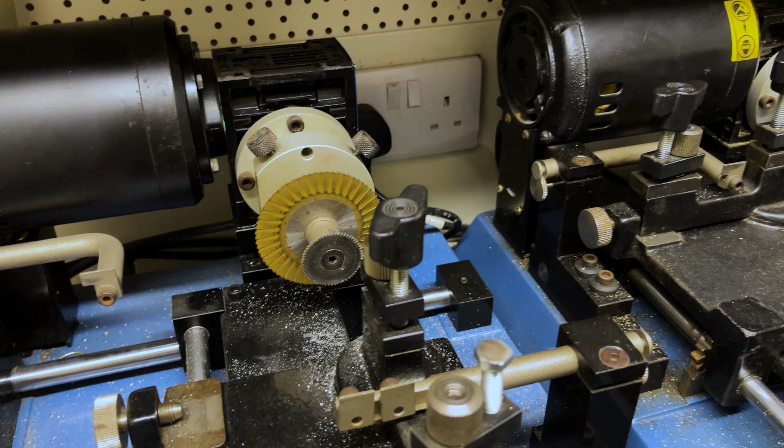Recently I obtained this key machine as a secondary machine to the existing one we already have. The reason being is this fixture is broken on the first machine, which doesn't allow you to swap from the A carriage to the B carriage.

The problem is when we received this second-hand machine, it doesn't have a blade guard. As you can see from this original machine, this blade guard screws onto there and covers the blade when you cut keys. This machine came with a temporary guard someone had manufactured out of a bit of flexible plastic, which wasn't really up to the job. So in this video I thought we could go about creating a similar guard for this machine.

Now luckily in this example we've got an item to copy straight off the bat. As you can see, this unscrews at these 2 points and the blade guard simply slides off. Because this is a similar machine, it slides onto there the same way. So the idea is to reproduce some kind of guard that will go on this machine to protect my eyes when I'm cutting a customer's key.

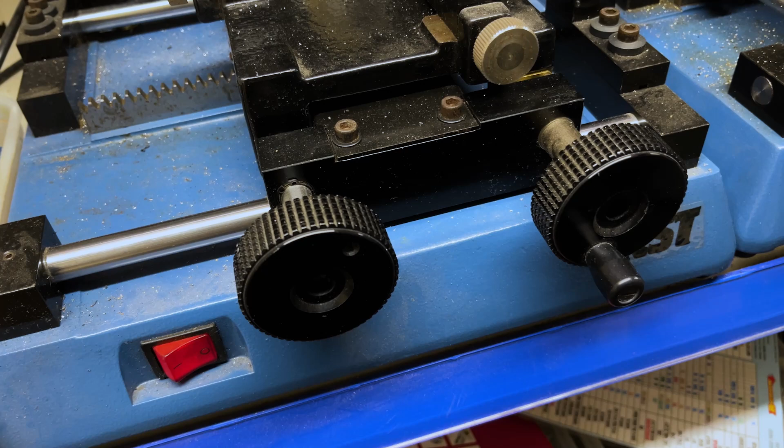A little bit of background about the machine - this is an RST Mortice machine, an American company. With us being in the UK, these kind of things are quite difficult to source. We'd have to find a supplier in the USA, import it, etc. By the time you do that, it becomes very costly indeed, just for this small piece of plastic.

And a bit of background about me in general - we own a key cutters and DIY shop here, so as you can see, if you just pan round, you can see the vast array of keys that we cut on a daily basis. So these machines are in constant use, so it's something that could really do with getting fixed.

So what we'll do is jump on a piece of paper, get some measurements, then into CAD, create a design, and see if we can 3D print this.

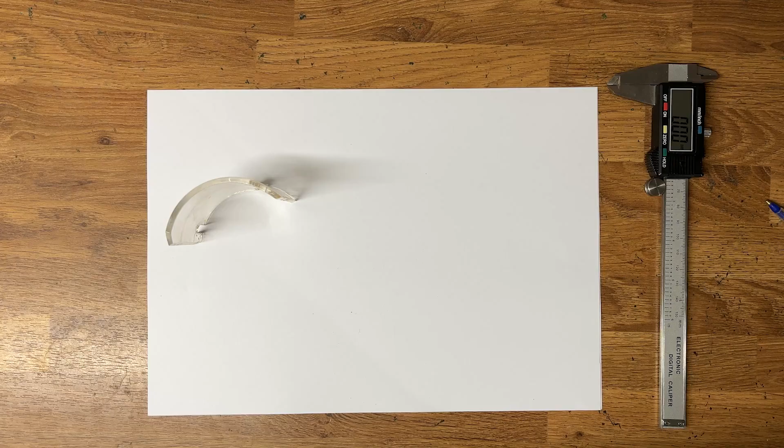So let's go about taking some measurements for this guard. I've got the guard, got some calipers, sharpen my pencil, so we should be ready to go. Now you'd think to yourself, first thing we do, let's draw a sketch. Not this time - first thing I'm going to do is actually trace around this object.

Now other people are going to have other methods of doing this. You know, you could take a photograph and then drop that into CAD, etc.

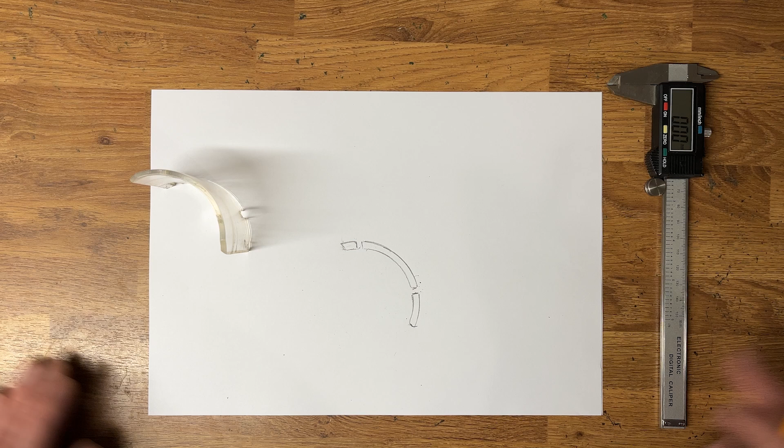What I'm going to do is take this traced image and put it onto a flatbed scanner. The reason to do this is because when you take a photograph of something, it tends to get a little bit distorted by the camera angles. Whereas if you've got the physical object and trace it, then put it onto a flatbed scanner and into CAD and calibrate the dimensions, you'll hopefully get a pretty accurate representation of what you're trying to copy.

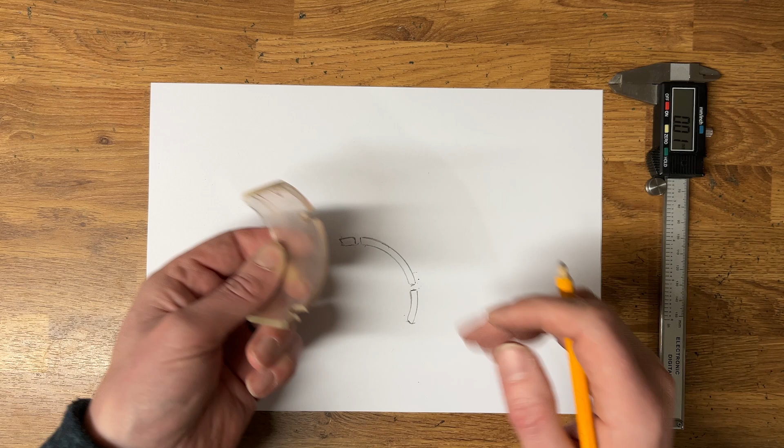So that's what you would say the base plan of this item.

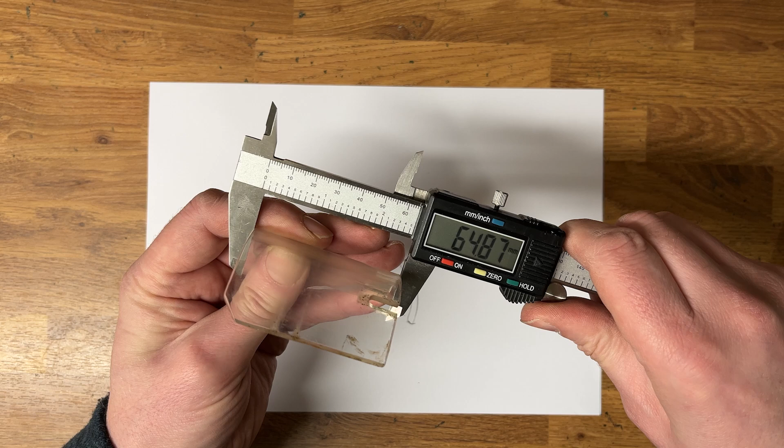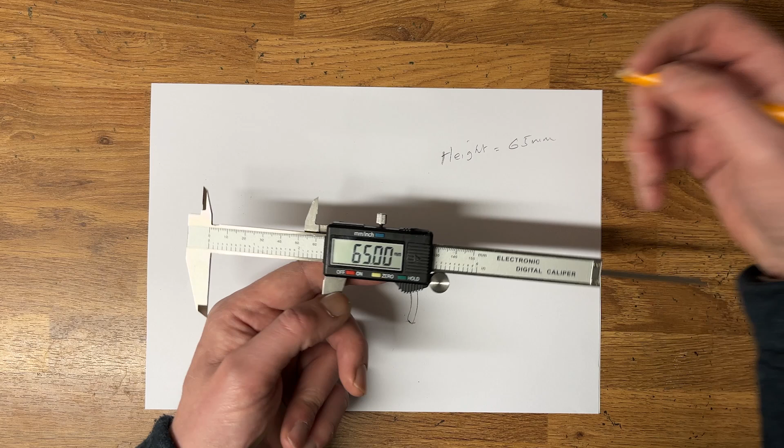Now there's a couple of measurements we do need. One being the height of the guard, which in this case we'll call 65 millimeters. So I'll just write height: 65 millimeters. I apologise, some USA viewers may prefer that in inches - 2.559 inches. Apologies that I can't do all the video in inches because I've got my CAD set up in millimeters, as that's what we predominantly deal with here in the UK.

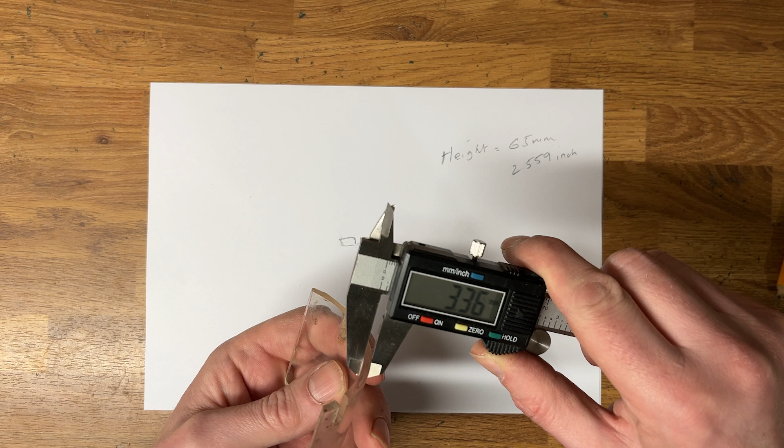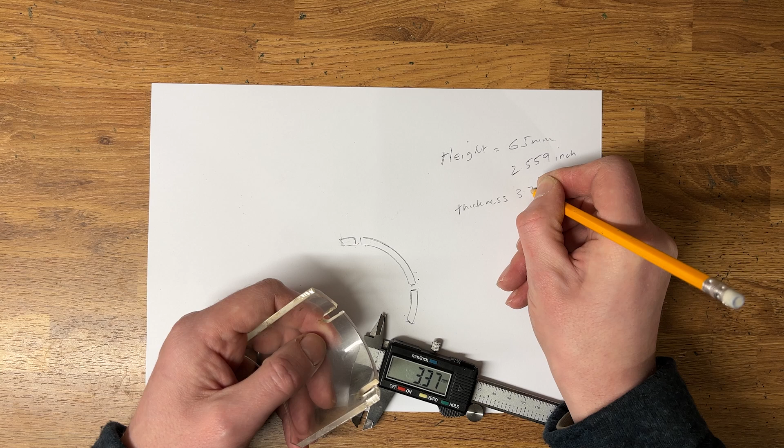The other measurement we need is the thickness, so in this case we'll go 3.3 millimeters there. Just to convert that to inches, 0.132 inches.

The other measurement we could do with is the overall height of this, where the screw hole's going to, which in this case I'll revert back to millimeters - 11.85. So that's as cut out, 11.85 millimeters. In inches, that's 0.465.

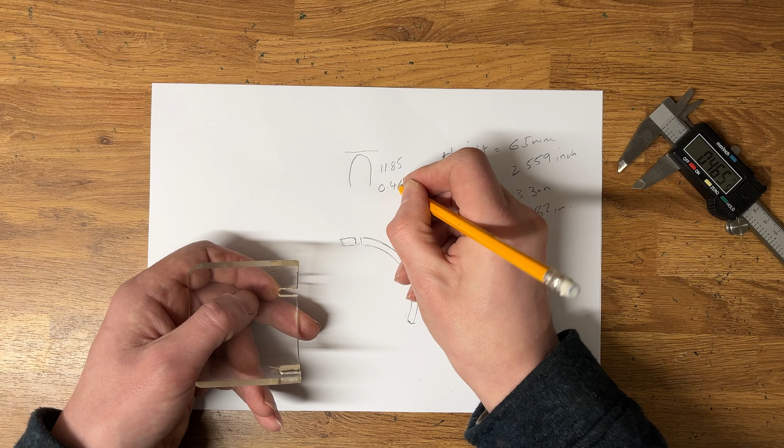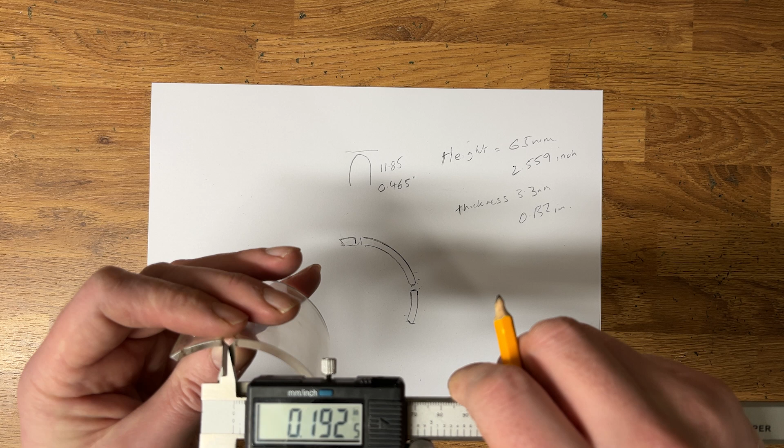And just for clarity on this drawing, I'll just take that bottom measurement. Again, converting to millimeters, 4.89.

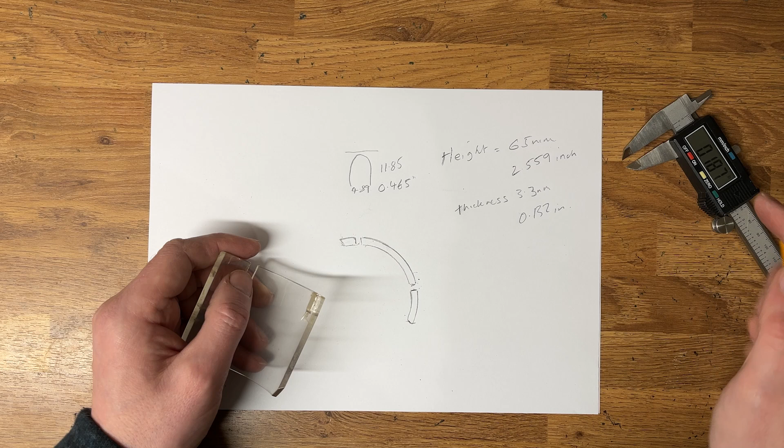Which is 0.187 of an inch. So that should be the basic measurements we need. Obviously, I've got to take into account these curves, etc.

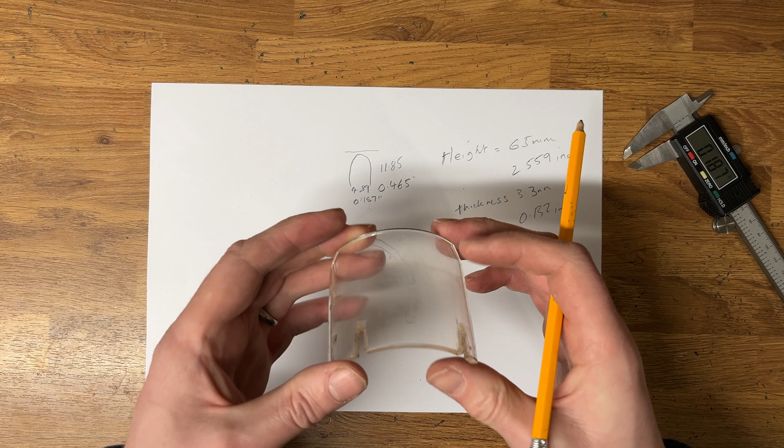I'll show you how I handle the shape of the bottom, or how I would handle it in the best way. As you can see, even this one's got a small crack in it. This is quite an old one, so it's had a lot of use over time.

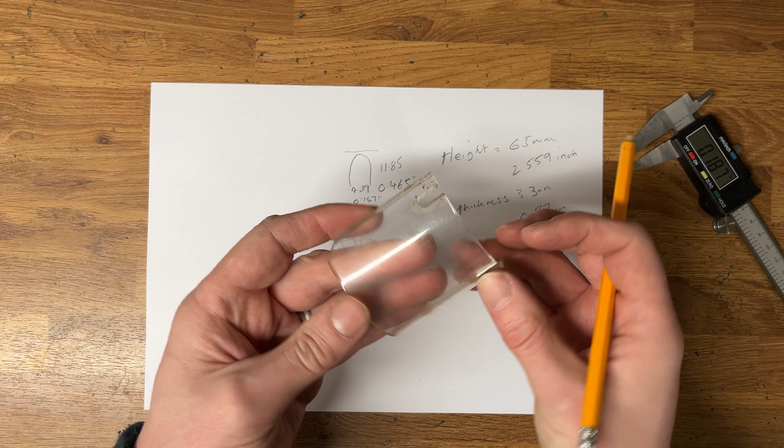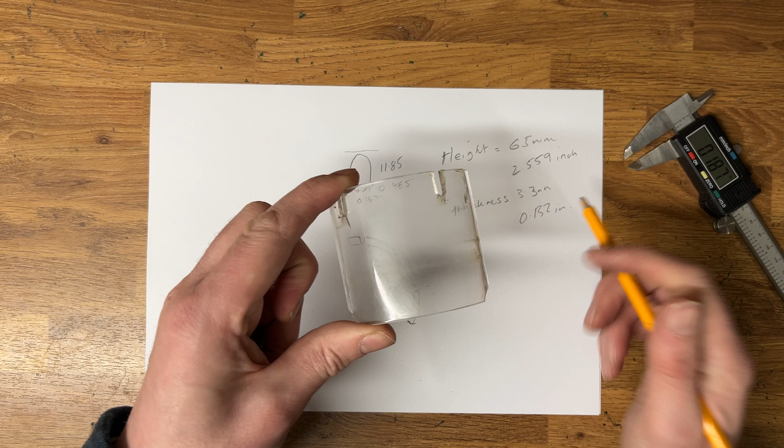You may be thinking, does it need to be in clear plastic? In an ideal situation, yes, but to be honest, where it's located, this covers the blade, and when you're actually cutting a key, you're not looking at the blade, you're looking at the guide. So in general you don't tend to look directly where the blade's cutting at a glance.

And you can see underneath. Obviously this guard prevents chips from flying and getting in your eyes, etc. So it's quite a much needed safety aspect.

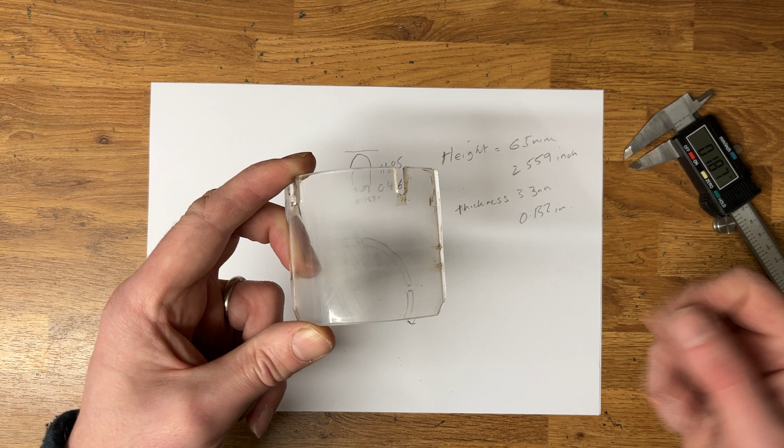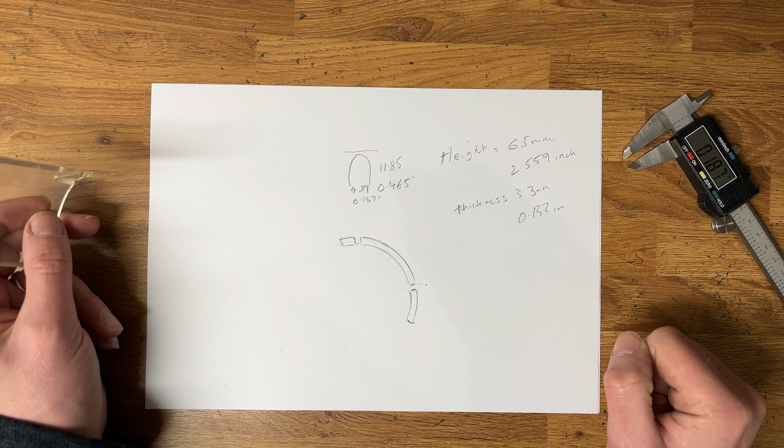So what I'll do is put this into the scanner, get a PDF, then take the PDF and import it into Fusion, and see if we can replicate this guard.

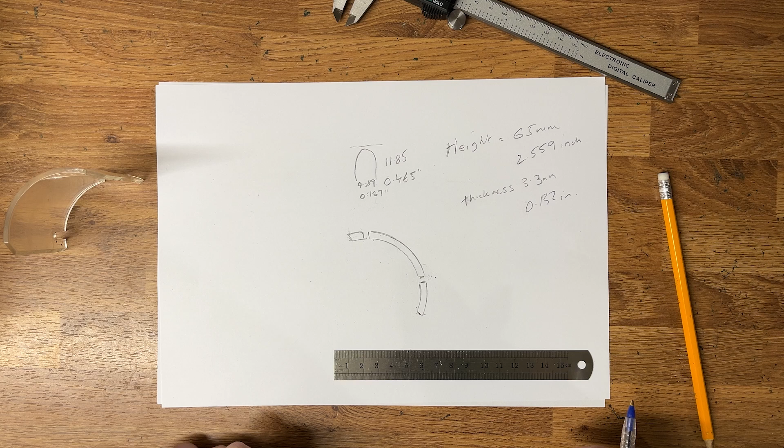One thing I forgot to mention is I've got a steel rule here, and a pen this time since it has a finer point. Not the greatest pen, if you can see. That's what I have to deal with in the UK - cheap, creaky pens that break instantly.

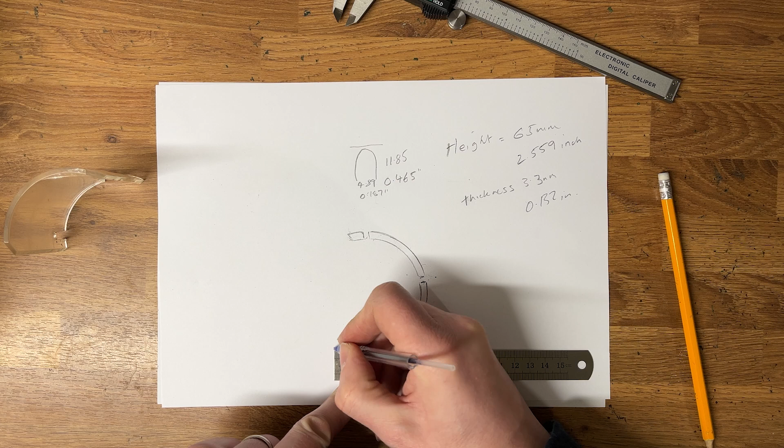Anyway, moving on. I've marked the end of the ruler, and I'm going to mark at 50 mils on this piece of paper, so we know the measurement between there is 50 mils. So when we scan that and go into CAD, we'll use that 50 mils to calibrate the image and get the size correct.

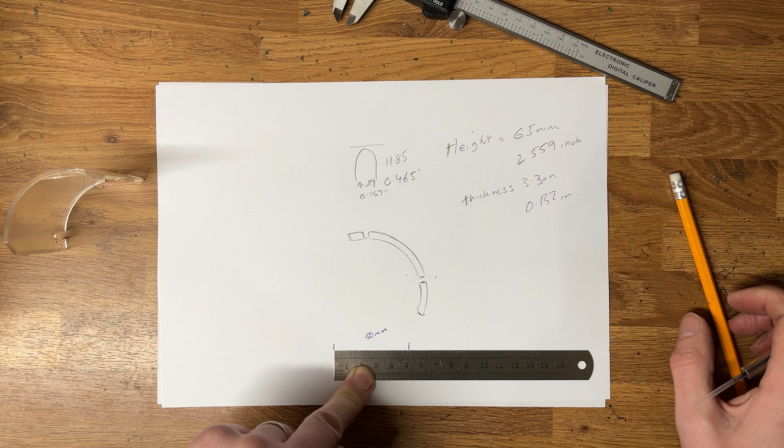So here we are again in Autodesk Fusion. Like in previous videos, the first thing I'm going to do is save the file.

In this case we'll name it RST Blade Guard. So it's always prudent to save the file first thing, and then hopefully it will auto save as you're going through - obviously try to remember to keep saving so you don't lose any of your work, just in case.

I exported a PDF file that I obtained from the scanner, and I realised I shouldn't have exported it as a PDF, because it doesn't import into Fusion as a PDF, so I had to re-export it as a JPEG.

I personally have an Adobe Cloud subscription, so I have access to Adobe Acrobat and other photo editing software, which you may or may not have. But I scanned the document into Adobe Acrobat and then exported that as a JPEG, so I can then import it into Fusion 360.

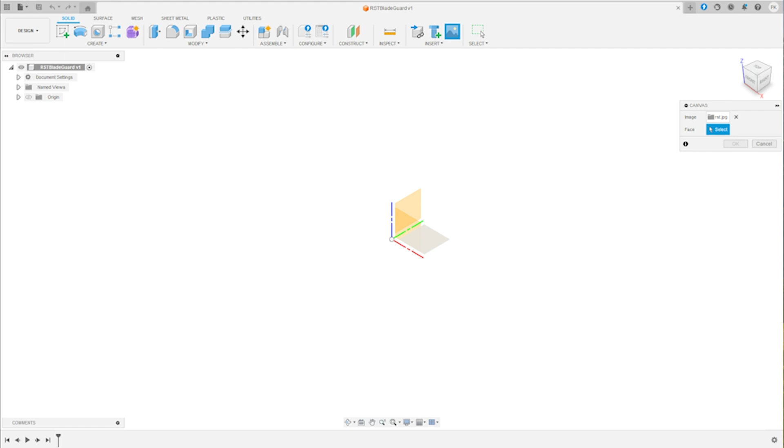So I'm going to select the horizontal plane. Click OK with that. Go down to a top-down approach, zoom in a little bit. You can see the scanned image.

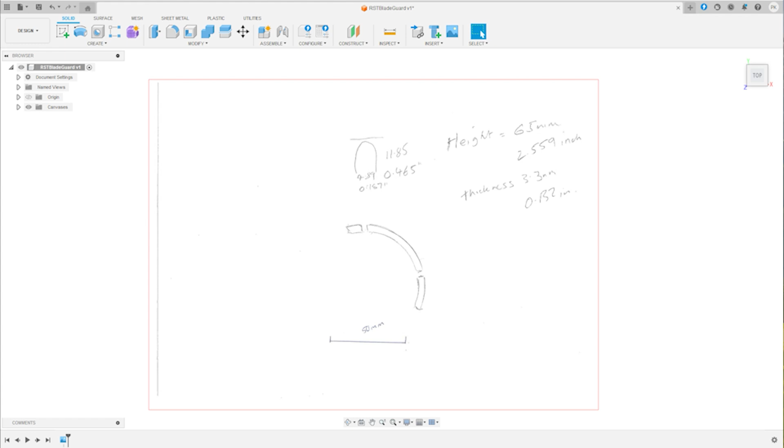The next thing I want to do is calibrate the image. To do that, find your image under canvases in the left-hand tree menu, right-click and click Calibrate. Basically this asks you to pinpoint two points and the distance between. So I'm going to select this point we put on the scanned image, and this point here, so we know the distance between these two is 50 millimeters.

So if I type in 50 millimeters, press enter, and just fit it to the window, you can see now this drawing is going to be dimensionally accurate.

So if we click measure, I don't know if it's going to allow me to do between two points - no, it won't allow that. If we were to click measure, that would measure 50 millimeters.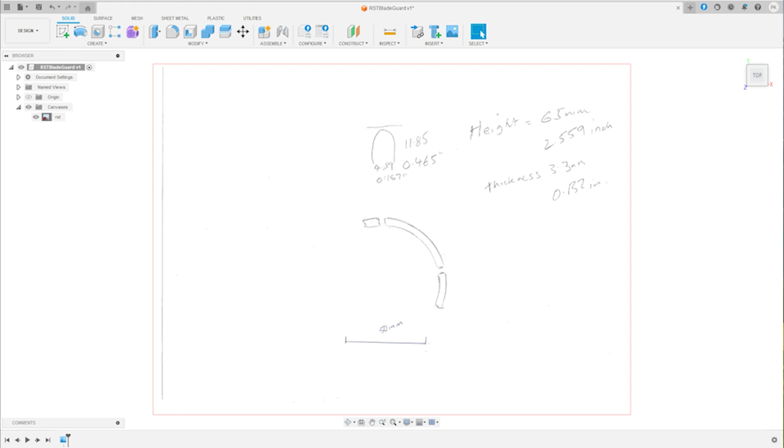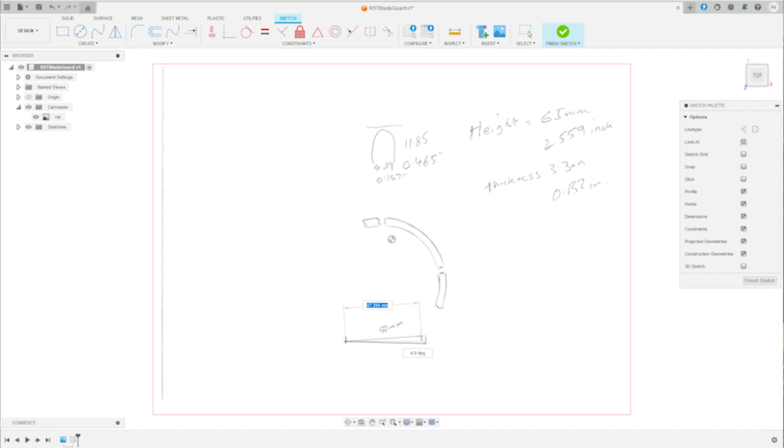So the next thing I'm going to do is create a sketch on this plane again. I'll just show you - if we press L for line, click that point and drag it out, you can see that's 50 millimeters almost. So I'll just escape out of that.

Now this is slightly tricky to work out how you would approach this. Now I'm going to create a circle, and I'm going to select a 3-point circle.

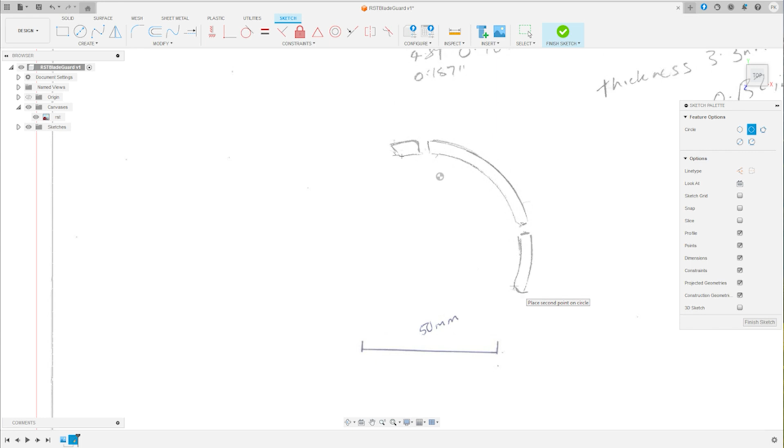So I'm going to click the inside left corner of this scanned image and the right hand side corner. And what it does, it allows me to drag it out. So I'm going to drag it so that this circle then finds the correct curve

of this scanned image. Now the reason I'm doing this is not to use this as a line for the final model. It's basically to get the center of this arc. Because in terms of this scanned image, this portion of this drawing is going to be a little bit greater because obviously we've traced around the object with a pencil, etc. So we'll have to take that into account.

So what I'm going to do, I'm going to create a new circle now from this center point, and I'm going to drag it out. I'm going to select what I would envisage the center of those pencil marks.

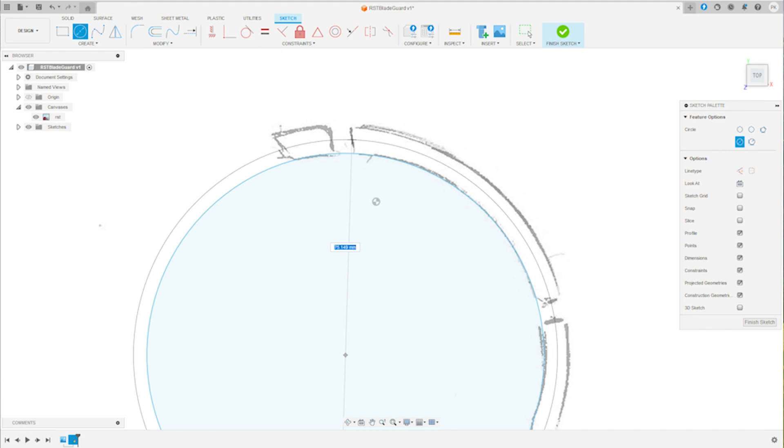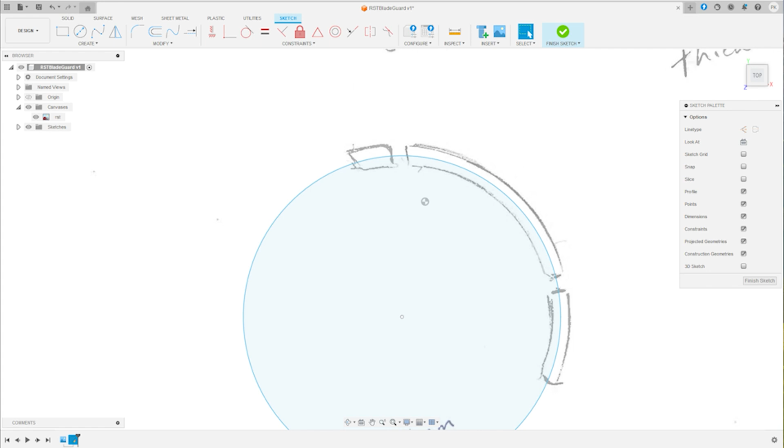And then what I'm going to do, I'm going to actually delete the other circle. So select it, press delete, just to get rid of that circle now. Right, so I'm just going to quickly save this.

So the next thing I'm going to do, I'm going to go to modify, change parameters, and I'm going to set some user parameters now. So the first is going to be height, 65 millimeters. Second is going to be thickness, 3.3 millimeters.

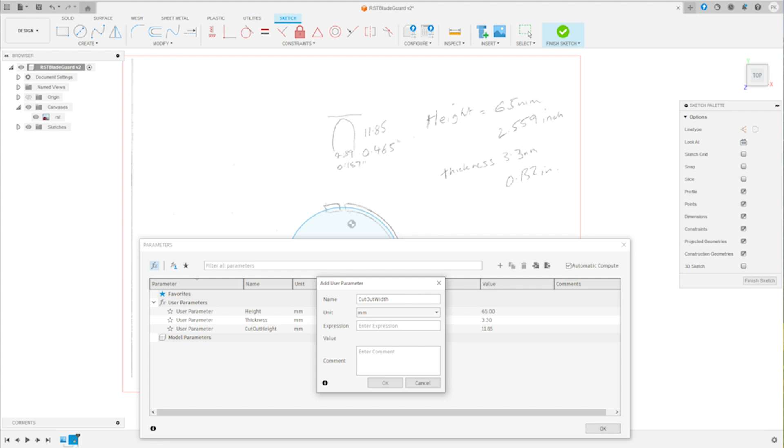Next is, we'll call it cutout height, 11.85 millimeters. And finally, cutout width at 4.89 millimeters. Just make sure you click OK on here.

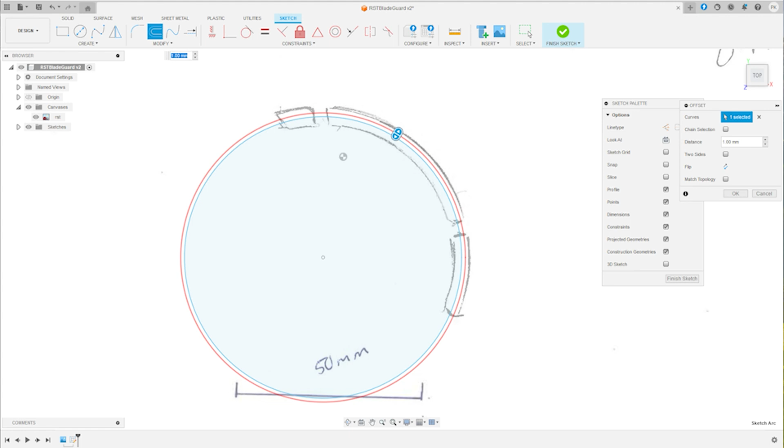So what I'm going to do now to get this measurement here, to get these two curves here, I'm going to use this offset command. So I'm going to click the line, click offset. As you can see on this menu, it allows you to pick two sides.

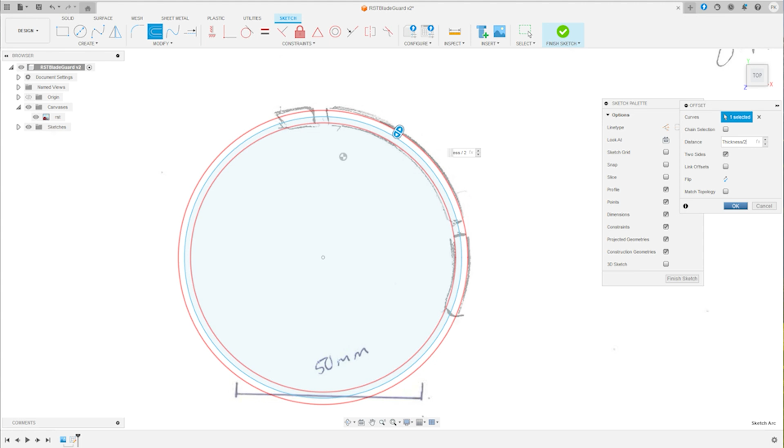So the distance, we know the thickness is 3.3, but we actually want to divide that by 2 because we're going on the other side. So select divide by 2 in the thickness, click OK. As you can see, we've now got two lines the correct distance apart on the right curvature of our sketch.

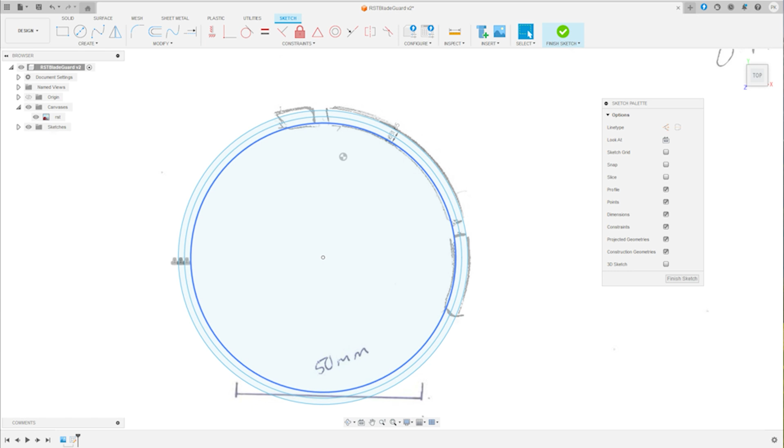So the next thing I'm going to do is try to account for these holes and also the edges of the part itself. So I'm going to create a new line. I'm going to go from the center here. I'm going to drag it to the point which is closest to that we've chosen on the sketch.

And also on this side, drag another one here. Another one there. Another one here. And another one here.

So what I want to do next is make sure that these two cutouts to my dimension is the same. Now, in Fusion, it only allows you to set the dimension as an angle between two lines that are not parallel. So in this instance, I'm just going to kind of eyeball this dimension.

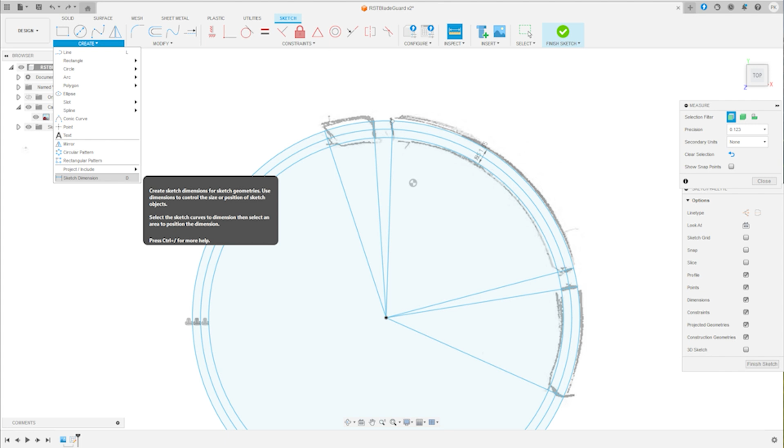So I'm going to go create sketch dimension, click the two lines, drag it up, see that's set at 5.7 degrees. Or we'll actually put 5.7 there. So I want to make sure that this one is the same, so when we go to do some of the features, they're both set to the same distance.

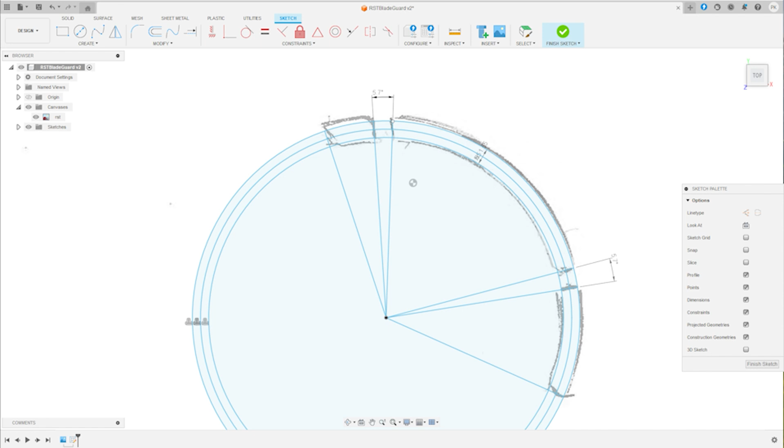The next thing I want to do is go and trim some of this off now. So I'm going to select the trim tool. I'm going to go in. I'm going to trim all these lines off now that we don't need. So take out the center line.

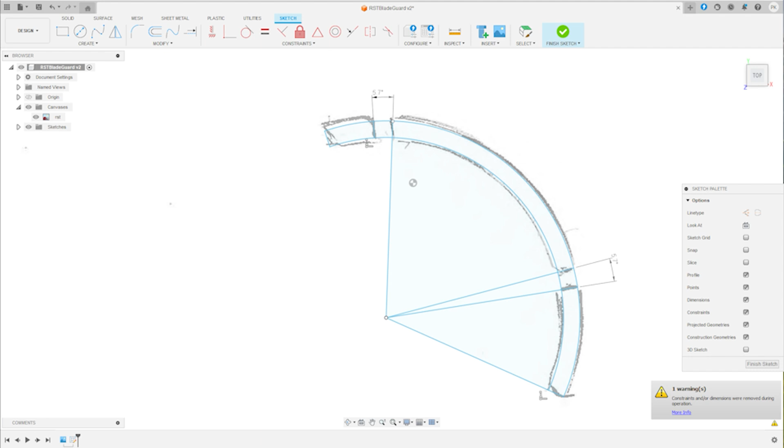On these now. And also take out these lines here. Just so it tidies it up a bit.

And the next thing I'm going to do, I'm going to turn this canvas off now. So as you can see the basic shape of a guard now. So now we've got rid of the canvas, I'm going to click Finish Sketch. Then go back into the 3D window. So now I'm going to click the Extrude command.

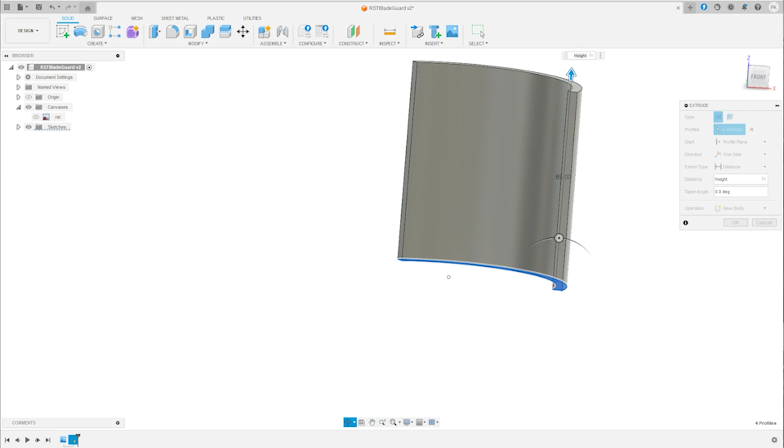I'm going to select all the elements for the time being. I'm going to click Height. So that will give us the height of the guard. Just going to rotate this now. So we get to the underside.

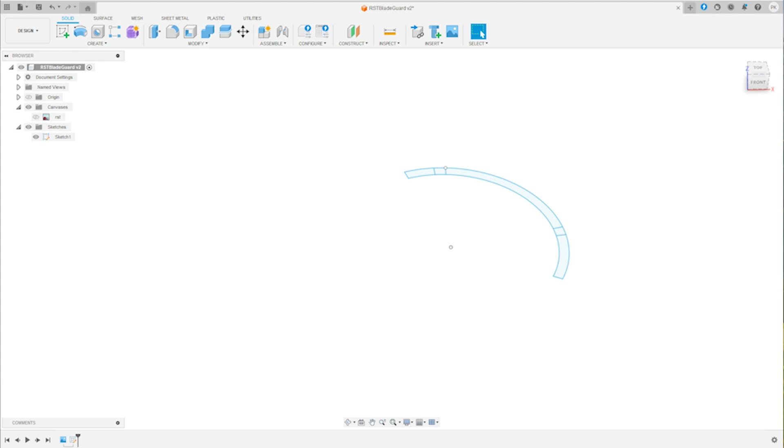Select Extrude again. Sorry, I made an error there. I'm going to go to Extrude. Height. Click OK. Turn that sketch back on.

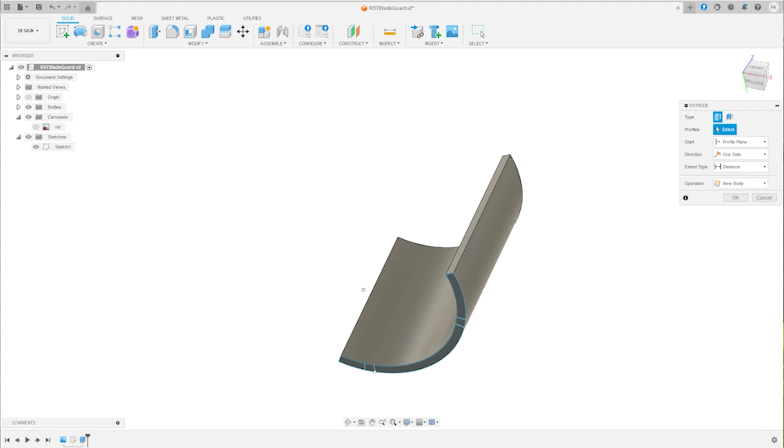Rotate this round. Press Extrude again. And select these two.

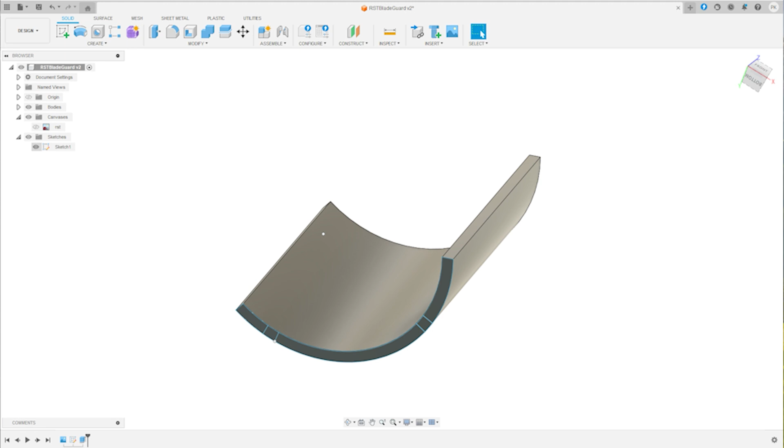Elements. It's not letting me do that now, so that means we've got an error somewhere. As you can see, I'm trying to do this all in one take, so you'll have to take my errors along with it. I'm going to go back into the sketch, double click on the sketch again.

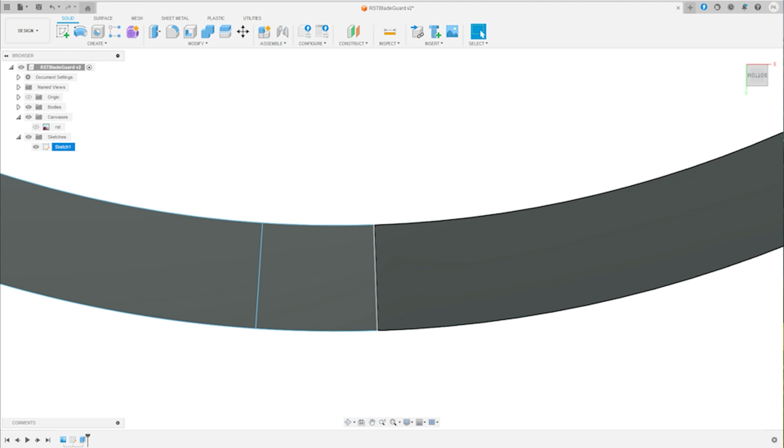I think, as you can see, that's trimmed too short. So go to modify, extend, click on that. Just extends that line to this point. I don't know why I did that, but we'll click finish sketch. Go back into a 3D view, rotate round.

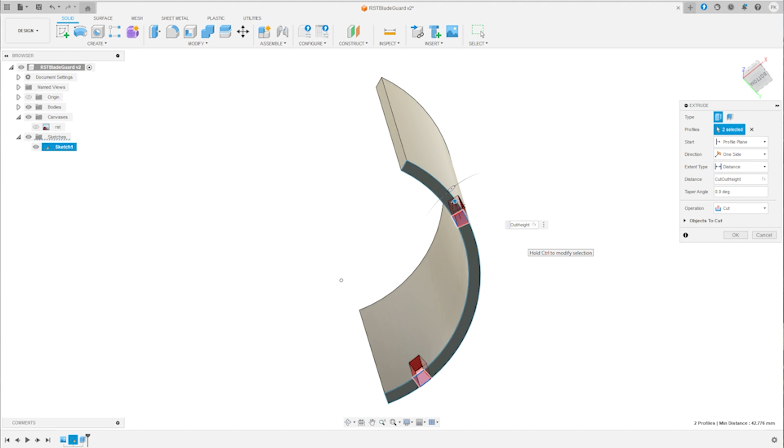Press extrude, select these two now. I'm going to create a cutout, but I'm going to set it as cutout height. As you can see, if we go back to the normal view now, this guard is starting to take shape.

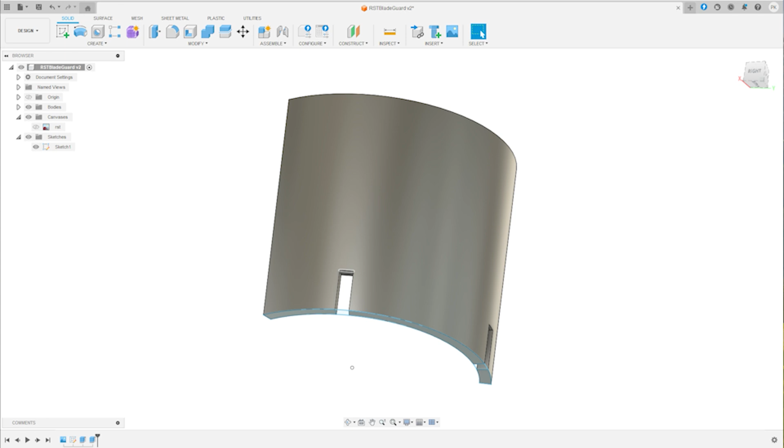So what I'm going to do next, really it'd be nice to have these curved, especially for when it comes to printing, so that we don't have any need for supports under here. So we'll click on fillet, zoom in to these corners there. Because it's on an angle, it won't perform a perfect arc.

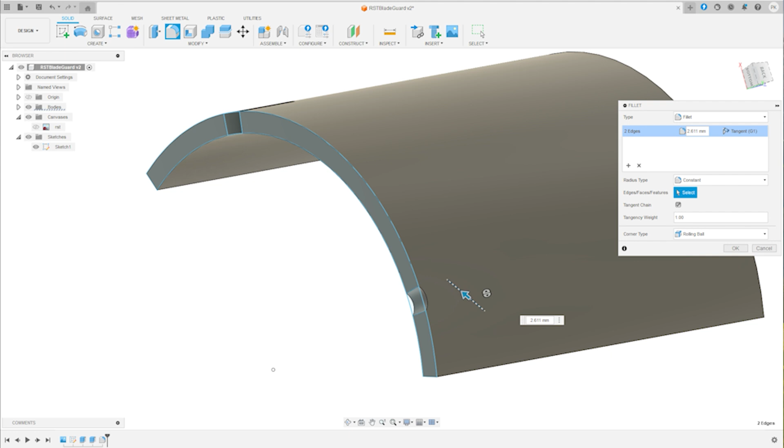Because these two lines are on a slight angle to each other, if we pull it as close as we can, call it 1.77, and click OK. Then we can go to the other one and make sure that is set at that same dimension. Let's go to modify, fillet, pull it out to 1.77, and there you have it.

So that's most of the guard now done.

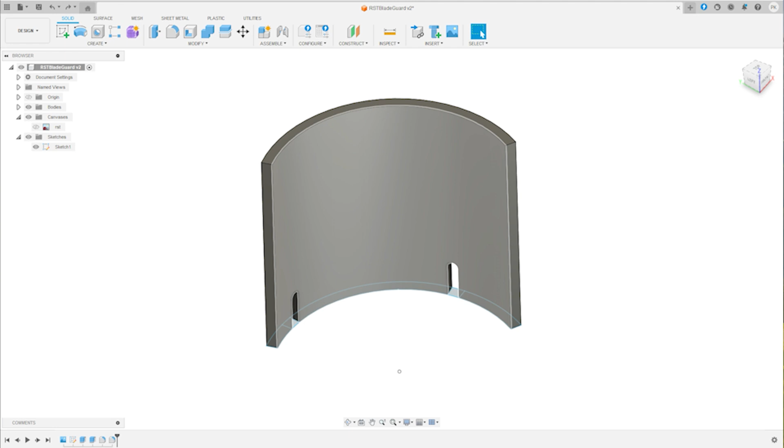So to smooth this off now, I'm going to fillet these edges. I'm going to select the top edge, these two side edges. Just going to drag it in slowly. Let's get it to marry up.

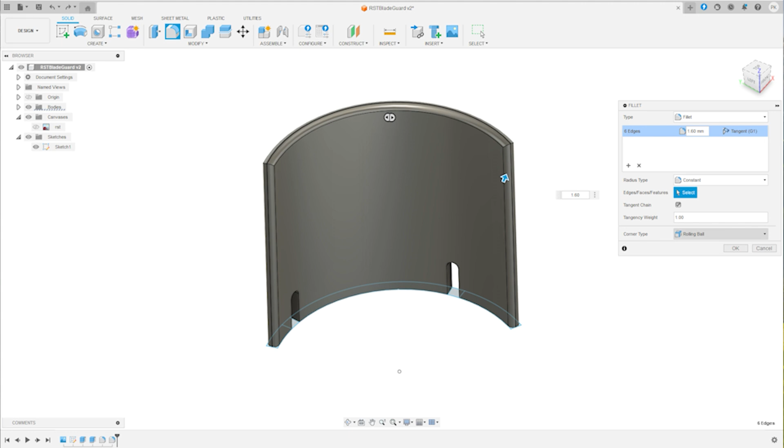I'm just going to see if it allows us to fillet these two edges. It doesn't always allow you to do it depending on what you've got. Well, it just let me do it now. So I'm just going to drag these in, set it at 10 millimeters. That gives a nice curve on these two edges. You do have to be very careful the order that you do these fillets in, because it doesn't always allow you to do certain operations.

So there you have it. That should be a good representation of the guard that we need. Obviously the only way is to try it and test it.

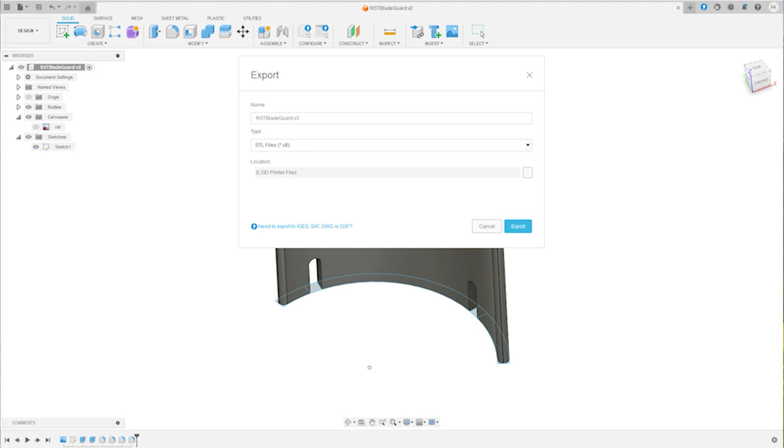So I'll just save this. I'm going to go to File, export, select STL. Just going to change the location. Click save. Oh, should I say click export? And there we have it.

We'll jump into Bambu Studio next and get this ready for printing.

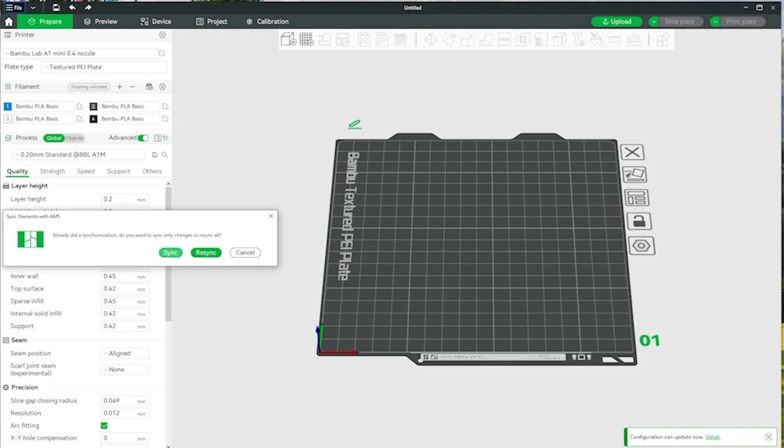So here we are in Bambu Studio. Going to create a new project. Change the device to one we've got. Sync the filaments. We've got some Bambu PLA Basics set in there. So I'm going to find the model.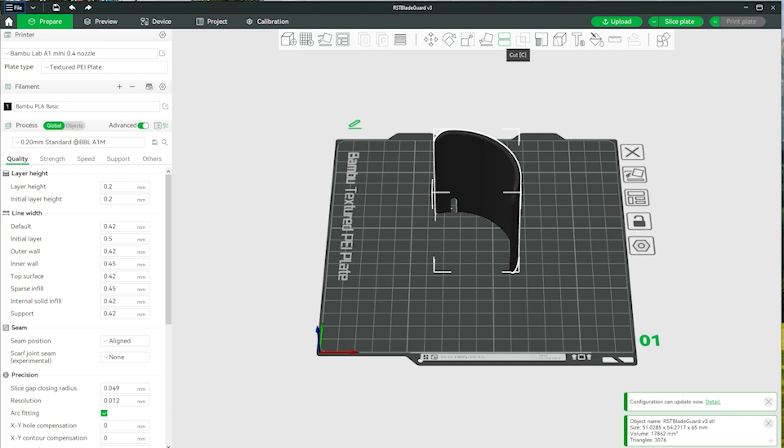So there it is. Now, because we want to do a test print first, I'm actually going to cut the model. There's no point printing it all out when you're not entirely sure as to whether it's going to fit or not. So I'm just going to press cut.

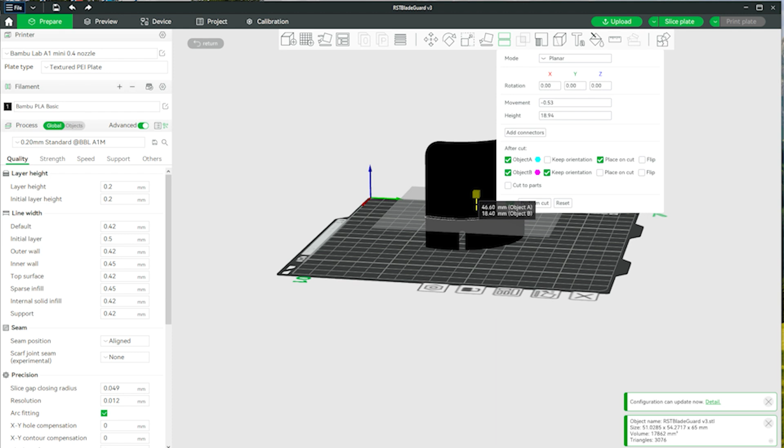Let's reset that. Did that wrong then. Reset again. I just want to drag it down the cut line just above the two slots so we know whether it's going to fit or not.

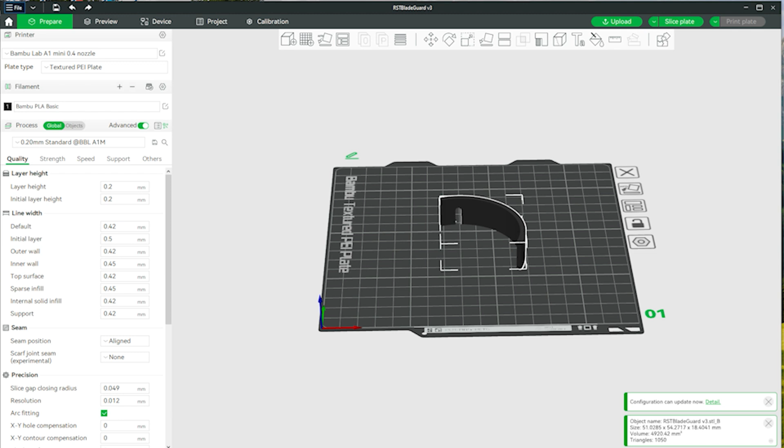Select perform cut, so then that produces two parts on the bed. I'm going to select this one and just delete that for the time being. Drag this bar into the middle.

And I'm just going to change a few settings. Change the wall loops to 3 to give it a bit more strength. And it's set to 0.2mm standard, which I think is good enough for this.

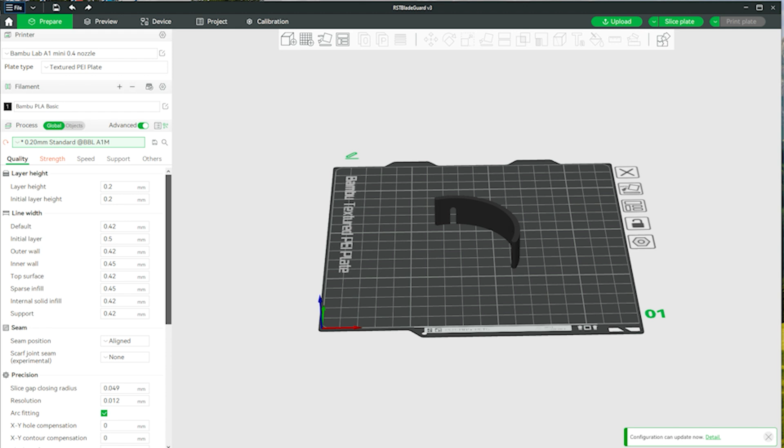So I'm just going to click slice. As you can see, it's going to take 19 minutes, 11 seconds.

And one other thing, just need to go back into the settings, change that to gyroid. I just prefer that setting on the infill. So as you can see, it'll start at the bottom layer, work its way up gradually, etc.

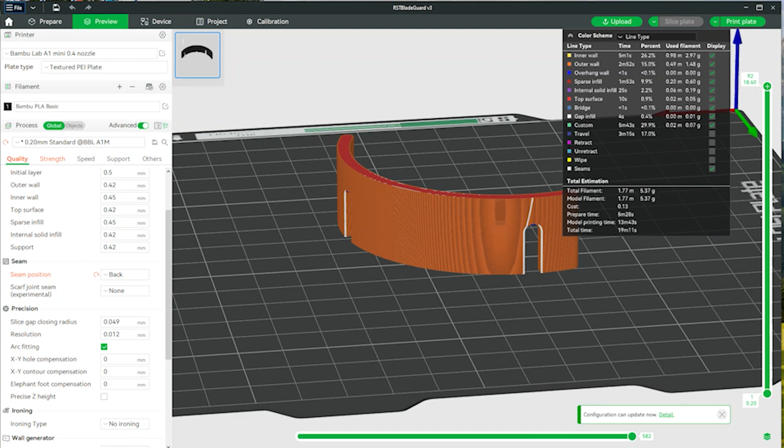The other thing I just forgot to do, just go back into the settings again. Just go to the seam, we'll change that to back. That tends to give a nice uniform line somewhere on the print. In this case, it's just on that top edge there. That's probably because we've got these set to 2 curves.

So I'm going to send this to the printer now. I'm not going to print it tonight because it's getting quite late. So I'm going to send it to the printer now and then reconvene in the morning and set it going on the printer.

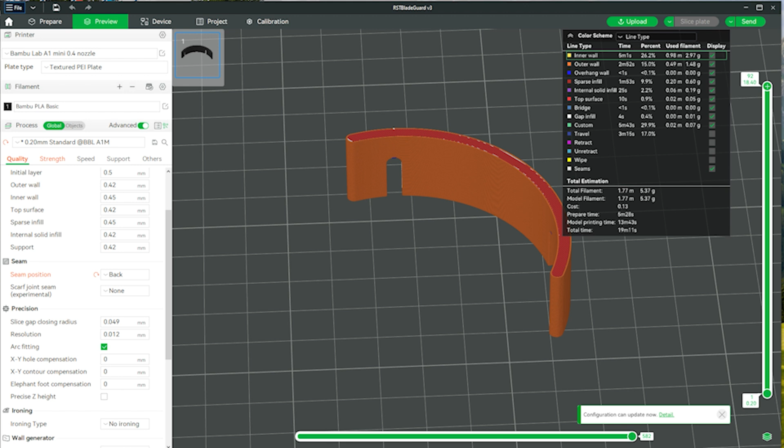So I've got the printer selected, and we'll send that up to the printer ready for printing in the morning.

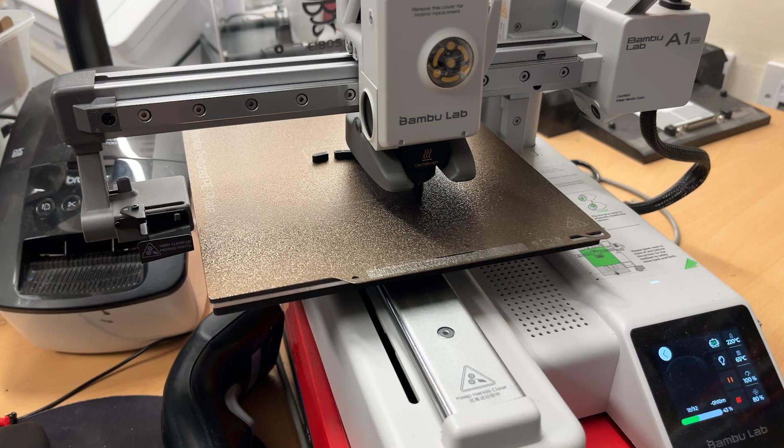So I've set the print going. It should only take about 19 minutes altogether. As you can see, again, printing very nicely on this machine.

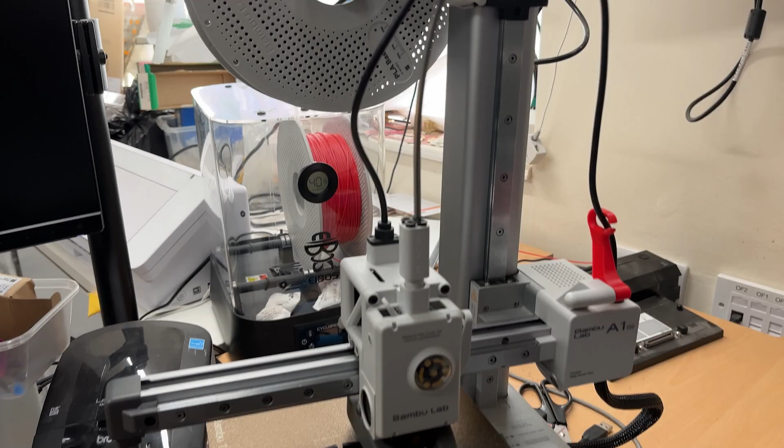Just put a small addition to the machine there. For some reason, I don't know if other people find the same problem, but this always gets trapped behind this stand here. Don't know why it's designed like that, but I just printed this off Makerworld to try and prevent that happening. So we'll come back when it's finished.

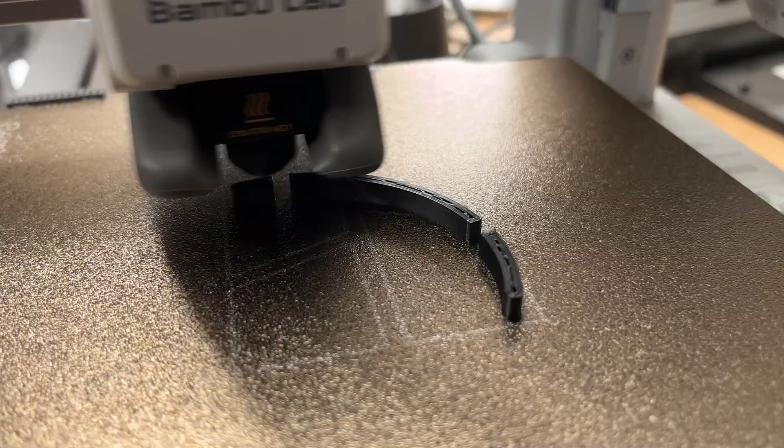So the test print is now finished. So we'll get this off the bed and go test it on the machine.

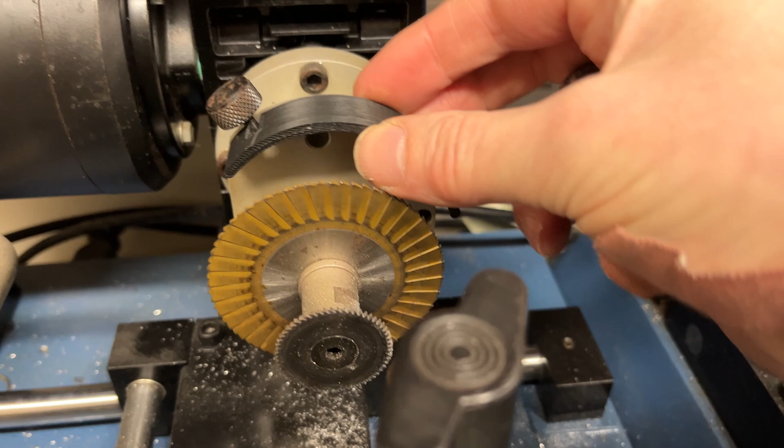So I've just come to do a test fit of the part, and it appears the screw holes are just a little bit too tight for these. It's not allowing me to get the other nut in, and I think it's just because the gap here is too tight, so it's not allowing enough flexibility in getting it in the exact correct position.

So I'll make some alterations in CAD and increase this distance and see if we get a better result.

So I've reprinted the design off camera. I haven't shown the CAD for this particular section, just so the video doesn't get too long, and also I was just running out of time to get this printed by the end of the day.

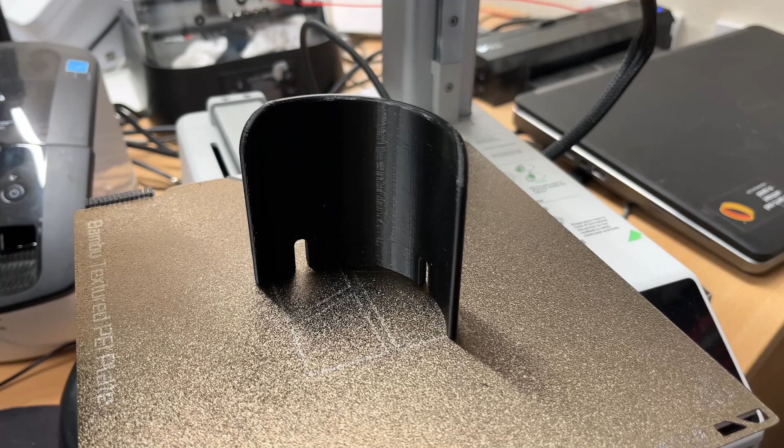So the alterations I've made, I've increased the hole size on each of these cutouts, and I've also just printed the whole thing out this time just to save a little bit of time. As I say, I was running out of time towards the end of the day, so we'll take this to the machine and hope this fits.

So here we are at the machine again. Give it a try now and hope it fits, fingers crossed.

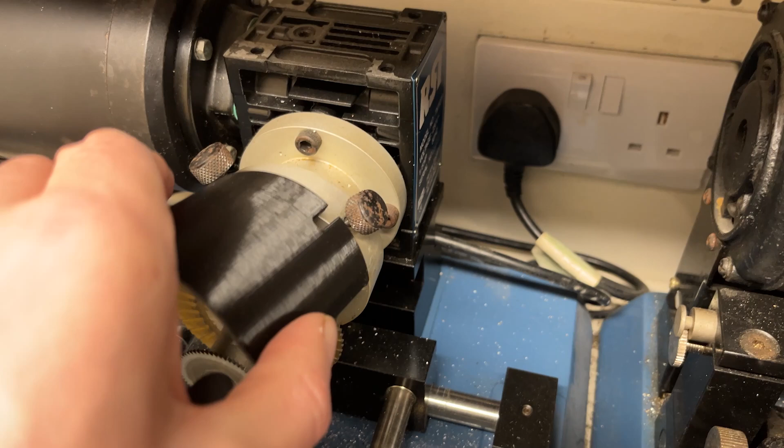Yeah, it's just a fraction tight on there, but once it's tight, it'll definitely do the job, as you can see.

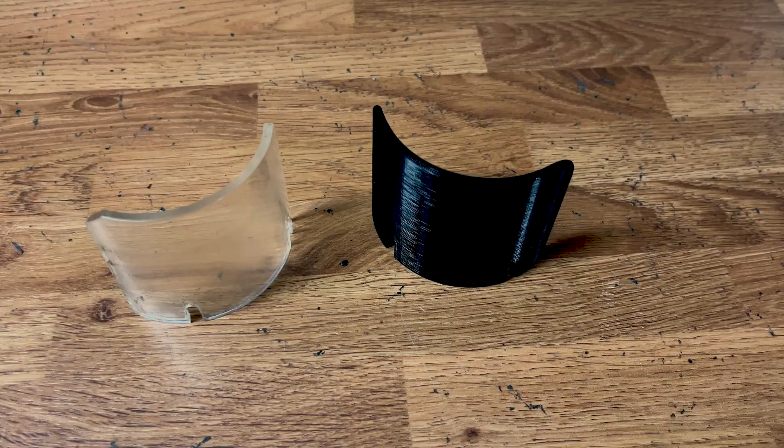Just got these two on the table so you can see a like-for-like comparison. The original guard versus 3D printed guard.

It's a good example to show you how quick and easy it is to replicate a part, and obviously save yourself quite a bit of money. To get these imported could cost upwards of $20 or more, or £20 upwards, whereas this costs approximately $1, £1 here in the UK.

And obviously a huge benefit is the time saving. Within maybe half an hour to design, an hour to print, we've got a finished product that we can use instead of waiting around for 2 or 3 weeks for one to be delivered.